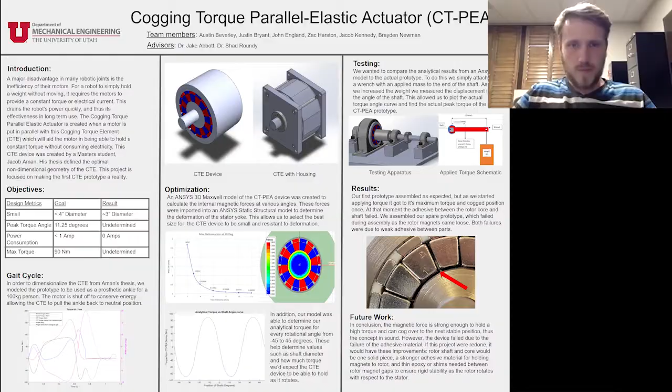A major disadvantage in most robotic joint applications is the consumption of power from the motor. For an artificial limb to hold a load without moving, it requires the motor to supply enough torque to complete the operation. This uses a lot of power, causing the motor to need constant charging and also lowers the motor's long-term effectiveness.

So our team project focused on building a device that would help conserve this motor power for a prosthetic limb while still giving the desired torque.

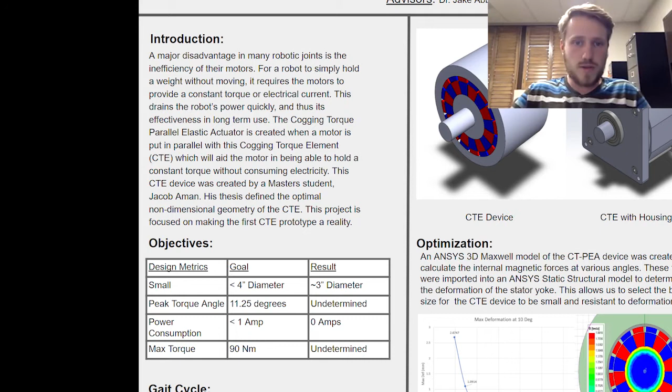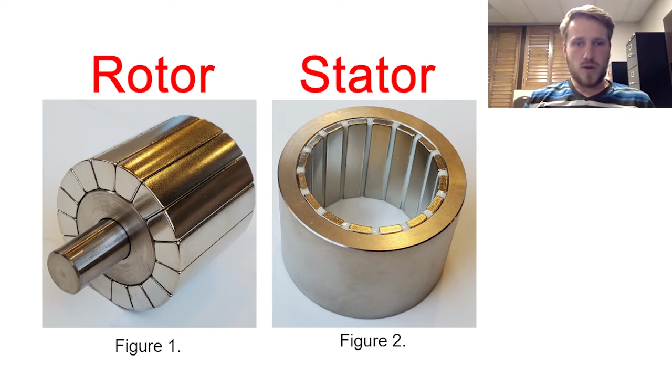This cogging torque element device was created by master student Jacob Aman, whose thesis defined the optimal non-dimensional geometry of the CTE. This device is essentially built with two parts as shown in figure 1 and 2. These figures represent the rotor and stator magnets, and these magnets are oriented every other north and south, and when combined together form a magnetic spring as shown in figure 3.

This magnetic spring gives us the magnetic torque device that we need, which will then be connected to a motor. The cogging torque parallel elastic actuator is created when a motor is put in parallel with this CTE device, which will aid the motor in being able to hold a constant torque without consuming electricity.

This torque is created from these magnets that form a spring-like action that can hold a specific amount of load at each cog. As that load is overcome, it switches and rotates over to the next cog, and is able to save power while holding that load.

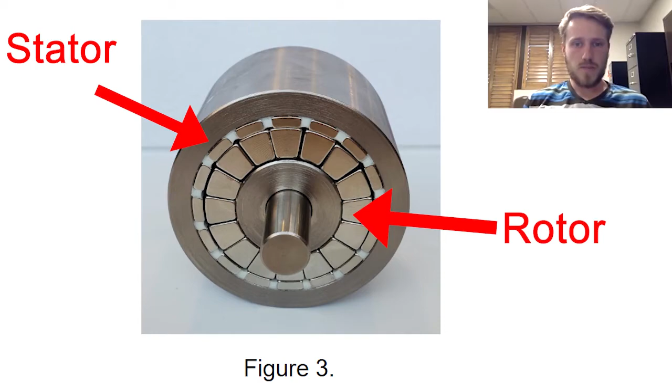Our objectives for building this project are: first, we wanted to make this object small enough that it can fit in a prosthetic ankle or elbow. We also needed it to have a peak torque angle of about 11.25 degrees when rotating. It needed to consume very low power, 1 amp or lower, and it also needed to provide a max torque of 90 Newton meters.

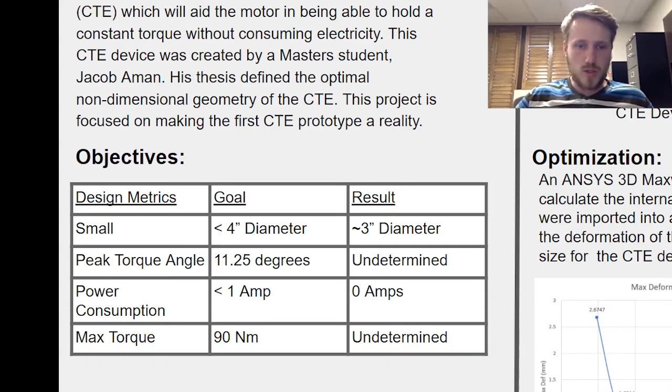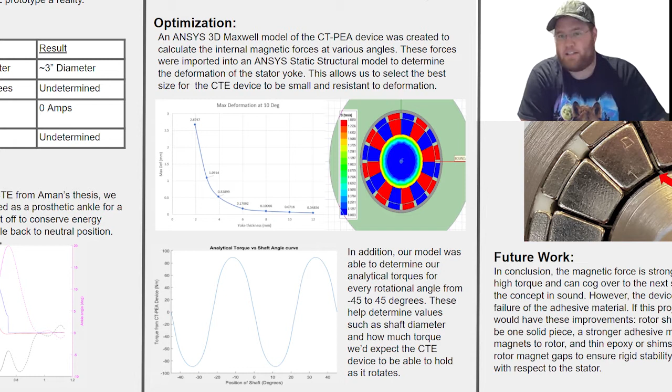So taking our goal of having our device be small enough to fit into a prosthetic ankle, and taking Jacob Aman's non-dimensional geometry from his thesis, we were able to dimensionalize our CTE device.

We then imported this geometry into an ANSYS 3D Maxwell model, in which we were able to run an internal magnetic force calculator. This was able to calculate the internal magnetic forces and torques acting within the CTE device for each magnet. As seen in this figure, the magnetic force was seen all the way around, and in the rotor core, it's very negligible towards the center.

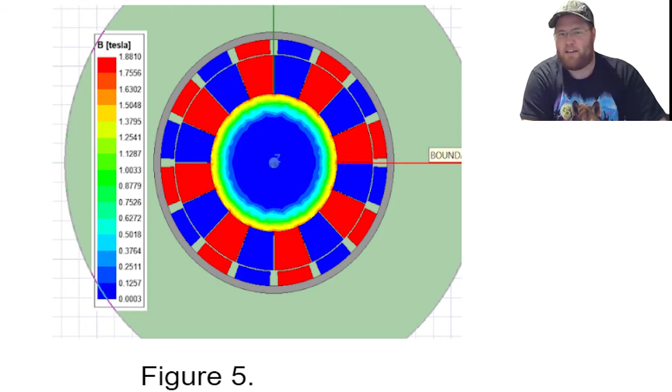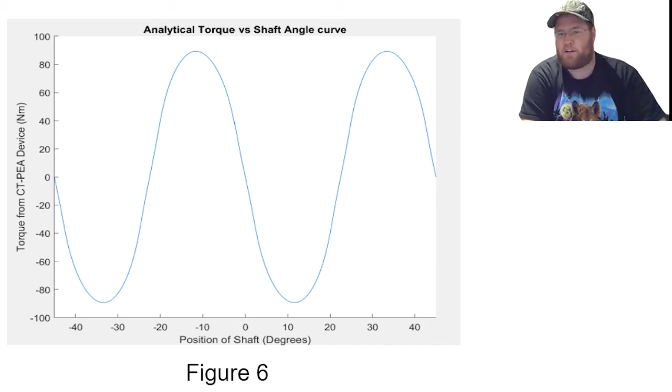In the next figure, the CTE analytical torques were plotted for every angle from -45 to 45 degrees of this device being rotated. These forces and torques calculated from the ANSYS 3D Maxwell model were then imported into an ANSYS static structural model.

This was to determine the amount of deformation these forces would have specifically on the stator yoke. As seen in this final figure, we can see that the max deformation was roughly at 10 degrees, and at different yoke thicknesses, we had varying levels of deformation. This allowed us to select the smallest size we wanted while still maintaining the ability to resist this deformation.

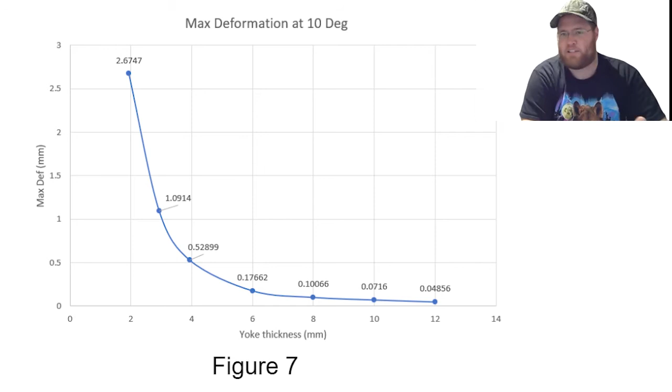So from here, we're designing a prototype that will be utilized for prosthetic ankles. To do this, we first need to find if the CTE torques would be helpful at the angles of the gait cycle. A gait cycle is the movement of a foot, starting with the foot flat on the ground and ending when the foot lands back on the ground. We received this data from Professor Tommaso Lenzi.

Using the analytical torque plot from our ANSYS 3D Maxwell model and the ankle gait cycle, we were able to calculate the torque applied by the CTE device. Using the known ankle torque and the CTE torque, we calculated the torque a motor would need to provide.

We plotted the torques from the motor, CTE device, and ankle, as seen in Figure 8, to visualize the behavior of each part of the system. To conserve energy, we shut the motor off at 0.75 seconds, which lets the CTE device pull the ankle back to neutral position.

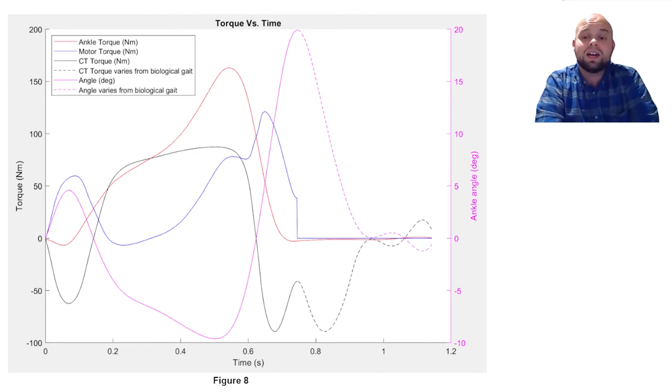For our testing setup, we wanted to compare the analytical results from the ANSYS model to the actual prototype. In this figure, we can see the SOLIDWORKS model of our actual testing setup. Our CTE device is attached to another shaft held up by pillow blocks.

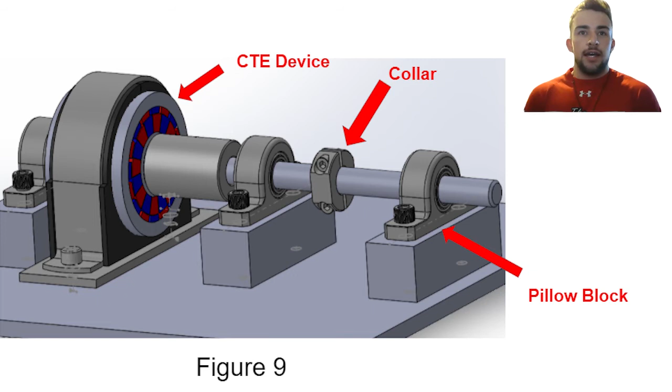The collar in the middle of the shaft allows us to attach a wrench and measure the torque. To do this test, we attach the wrench to the shaft with an applied mass to the end of the wrench, as shown in the figure.

As we increase the weight at the end of the wrench, we measured the displacement in the angle of the shaft using a protractor attached to the testing device. This allowed us to plot the actual torque-angle curve and find the actual peak torque of the CTE prototype.

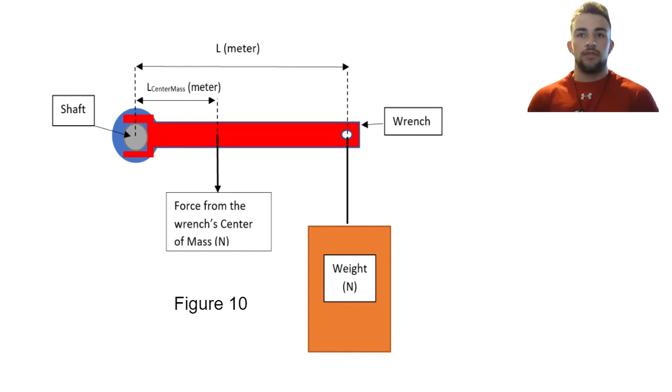Going into our test results, our first prototype was assembled and everything went well until we decided we wanted to make sure it could cog as it should. So we applied an unmeasured torque to it, and it cogged once, and then the adhesive between the rotor shaft and the rotor core failed, so the shaft was able to turn when it wasn't supposed to.

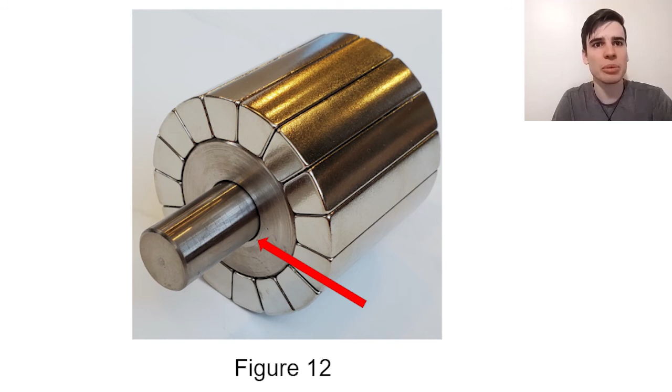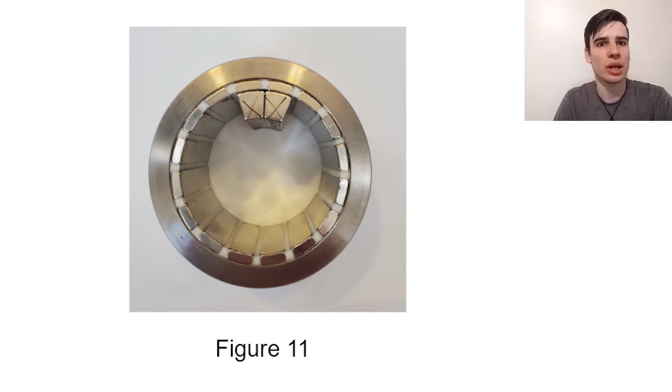We disassembled our first prototype and put together our spare prototype, but during assembly, the adhesive between the magnets and the rotor core failed. So we weren't able to measure our peak torque angle or our max torque because of the adhesive failure, but we did reach our objectives of having a small diameter and not consuming any power.

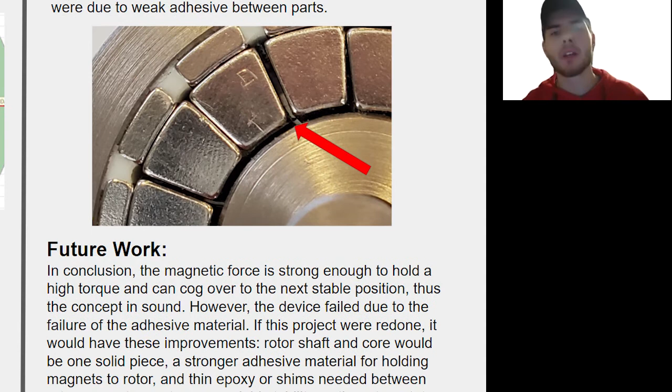In conclusion, our CTE device's magnetic forces were strong enough to hold the high torque as we hoped, and it was able to cog over from one position to another. So the concept is okay, but the problem was that our device failed due to the adhesives not being strong enough. If this project were to continue in the future, we as a group would recommend the following improvements.

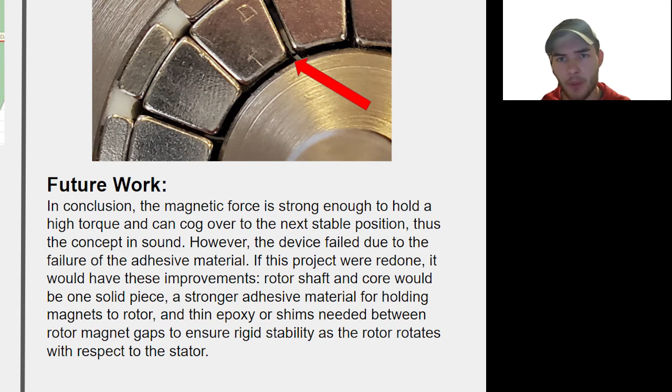We suggest the rotor shaft and the core be made as one solid piece rather than two pieces press fit together with adhesive. We also suggest a stronger adhesive be used when holding the magnets to the rotor, as well as a thin epoxy around the magnets on the rotor, just like shown with the magnets on the stator.

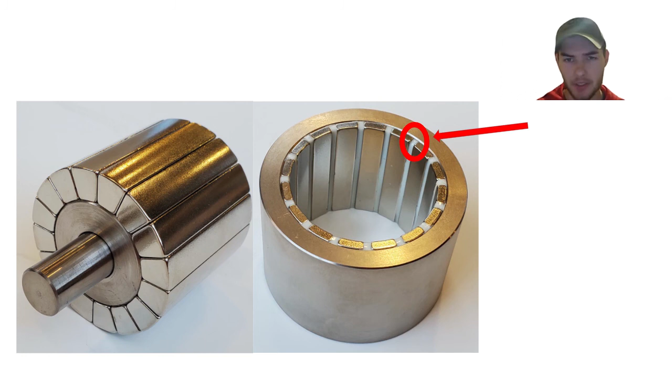You can see in Figure 13 where the magnets failed and pulled off the rotor, and the gap between the magnets shows that.